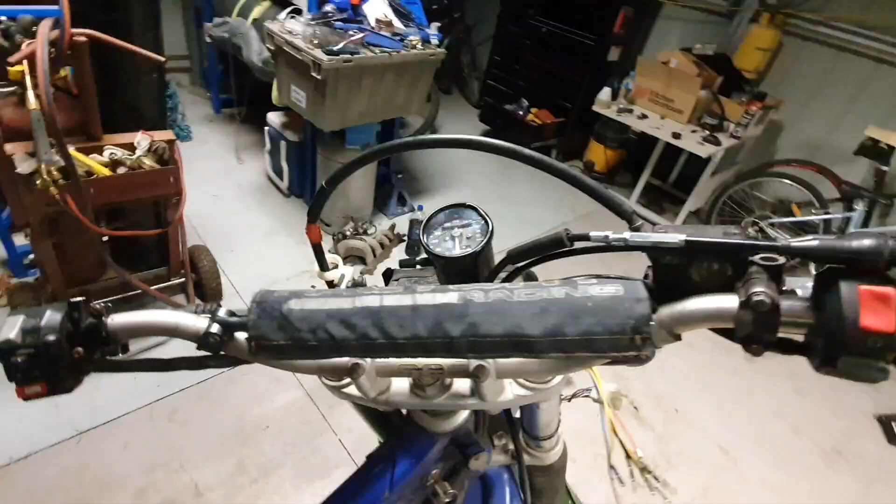Hey friends, what we're doing today is looking at the TTR and a small little problem we've got. I was fitting a speedo up onto it because we're trying to get this thing ready for roadworthy. Ignore the cracked screen, that's a completely different story.

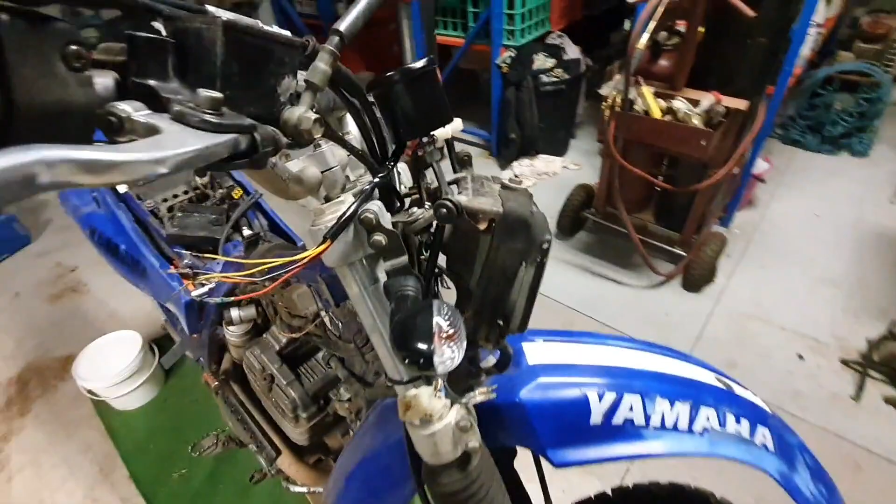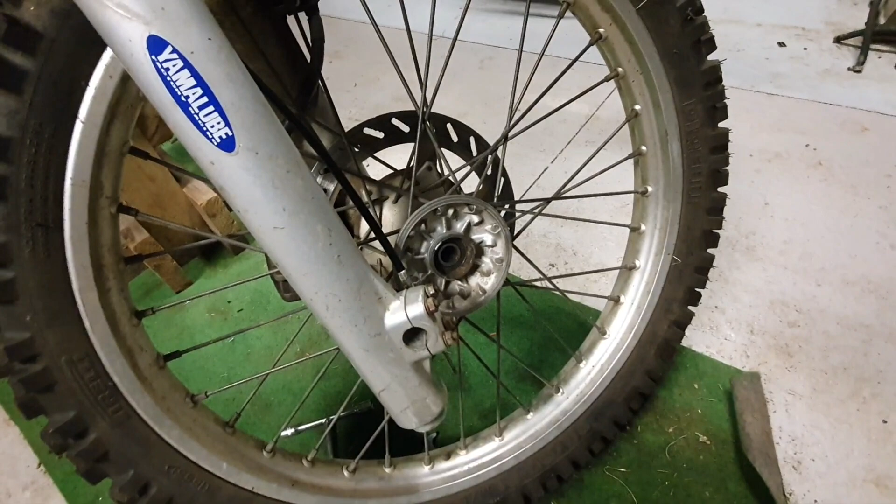But we fitted it up there on a bracket. Just did a little bit of bending and some mounts up there, and found a new speedo cable for it. And that comes down here to the wheel where there's normally a speedo drive. What I found is that when it was all fitted, it was spinning the wheel and the speedo wouldn't work. So a bit of a process of elimination.

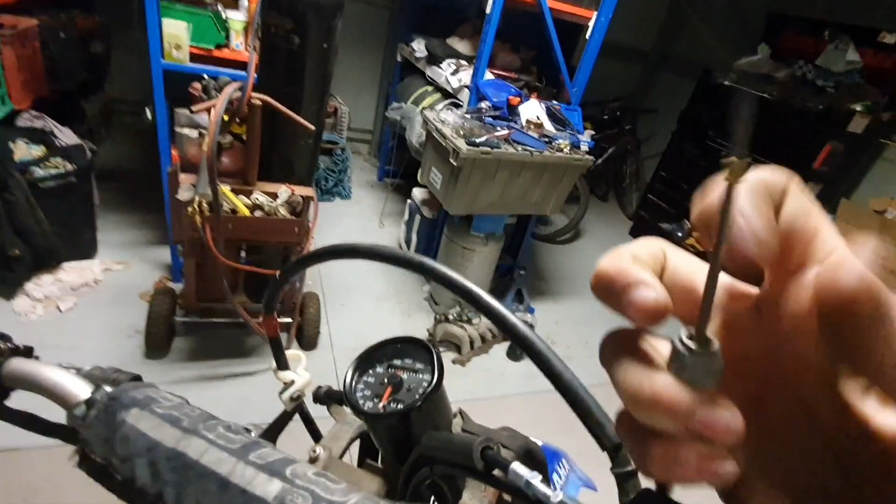Grabbed the speedo cable up here and got that all up in. Just push it back in there to line up. And I'm not sure if you can see that, but it is in fact moving when I spin that speedo cable. Don't quite have the fingers to spin it quick enough, but yeah, I think you can see that. It is moving ever so slightly.

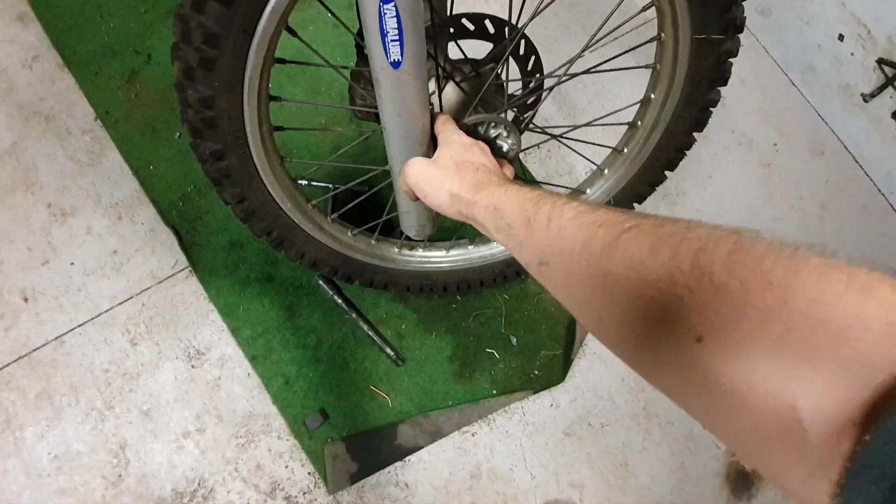So it says the speedo's okay, it says the speedo cable's okay, but it seems there was something up with the speedo drive. Now if you have a look in there, you can see a bit of rust and corrosion and gunk and all that, and that's probably going to tell you what the story was.

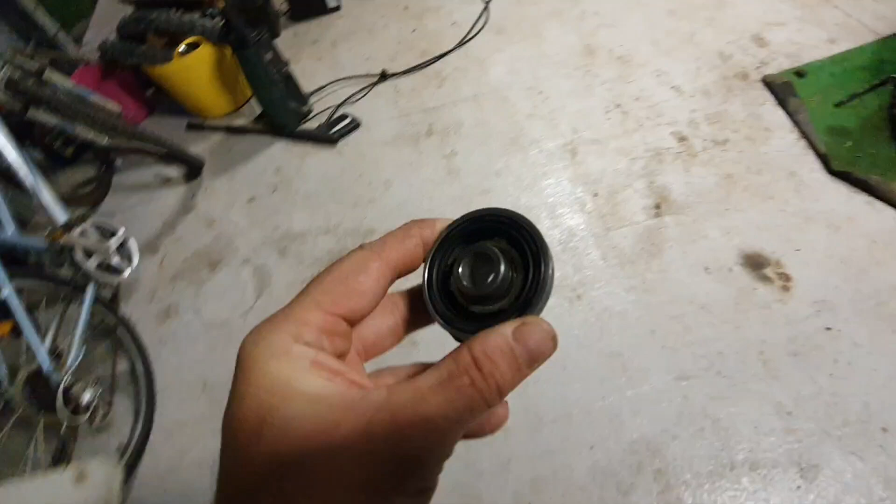Now I've already had a bit of a look at this, and this is the speedo drive, and that lives down here, something like that, and these two little nubs there sticking out of the wheel hub drive these two little teeth. Now when we're looking at that, it all seems quite clear.

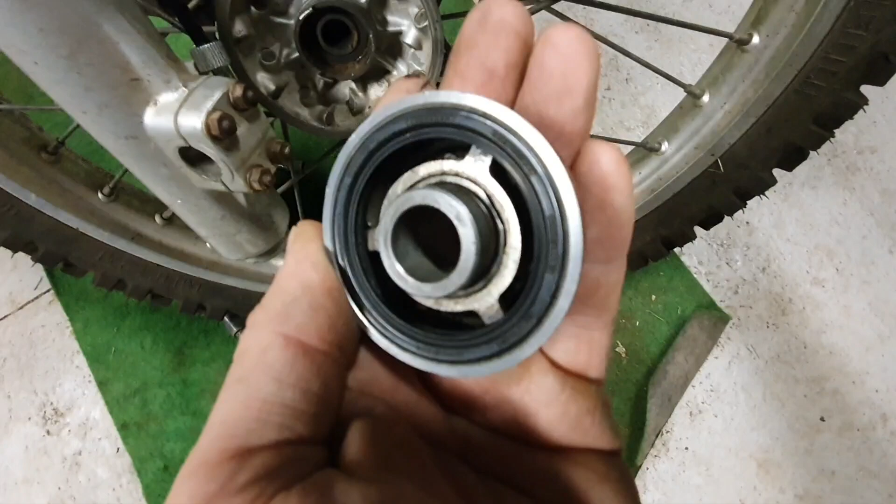I took this apart a few minutes ago and it was all just covered in gunk, and it seems as though that outer ring there is meant to sit on a couple of little flat surfaces on the drive gear in there. I'll take it apart so you get a better see. Alright, so I brought it inside where we've got a bit of better light and we can see what's happening in here.

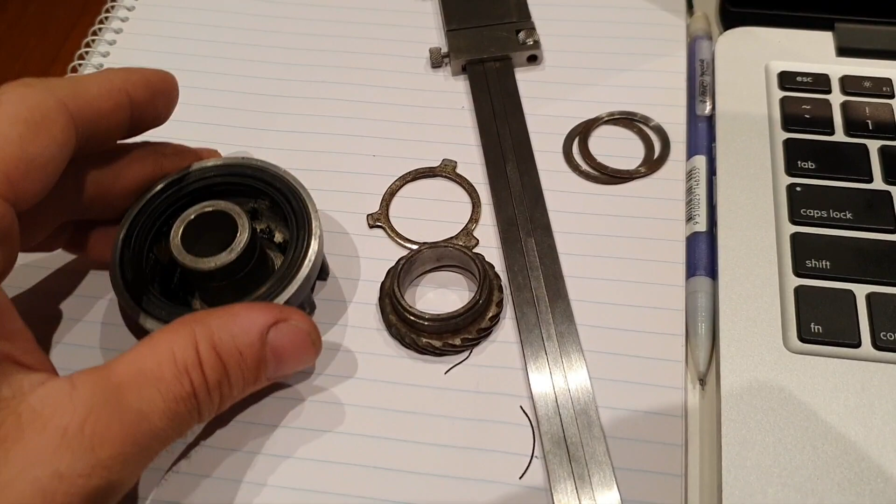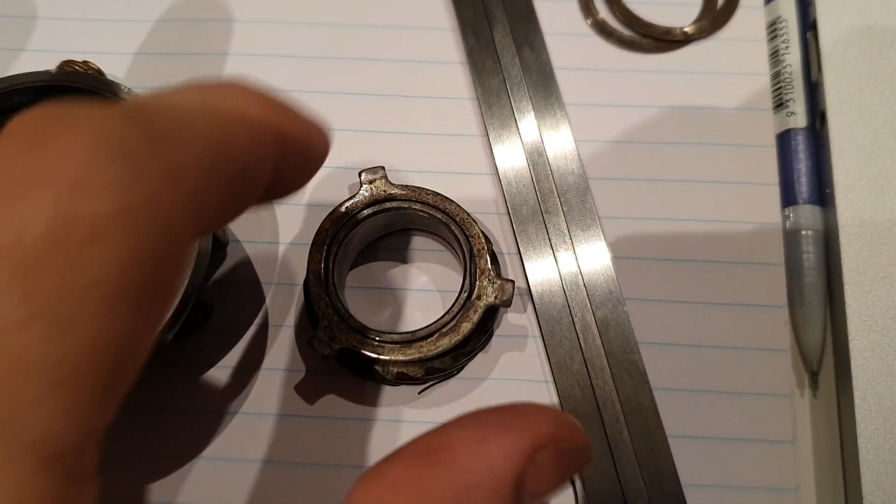This piece here is meant to go on here. And there's two little flat surfaces that have been machined on that gear there. One just in here and one here.

And this little ring, once upon a time, looks like it had a couple of matching flats, probably about there and there, just judging by the wear marks, that would keep that locked in place so that when the gear turns, or more to the point, when the three-spoked ring there turns, the gear would turn. A little corresponding gear up in there gets turned, and that would spin the cable and get the speedo spinning.

So I was thinking there's a couple of things we could do to fix that. One would be to just get a little welder out and maybe weld those flats back up, file them up, reshape it. Then I thought maybe we could cut another one of these plates from scratch out of a bit of steel.

But I figure it's kind of a sacrificial piece. It's the bit that we want to fail, and it'd be great to maybe have a few replacements of them. So I thought, why not put one of these 3D printers I got kicking around to good use. The idea is that I want something almost exactly like this little black piece here that's going to go sit on top of that there and replace this metal tri-spoke washer.

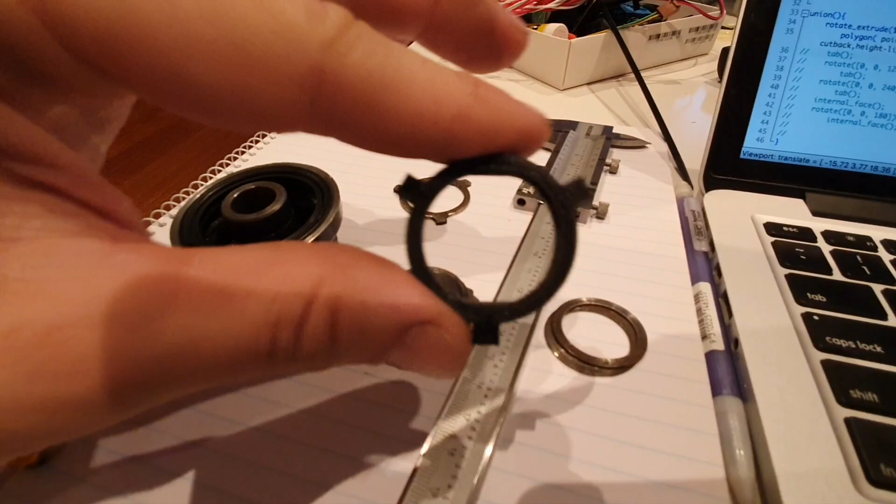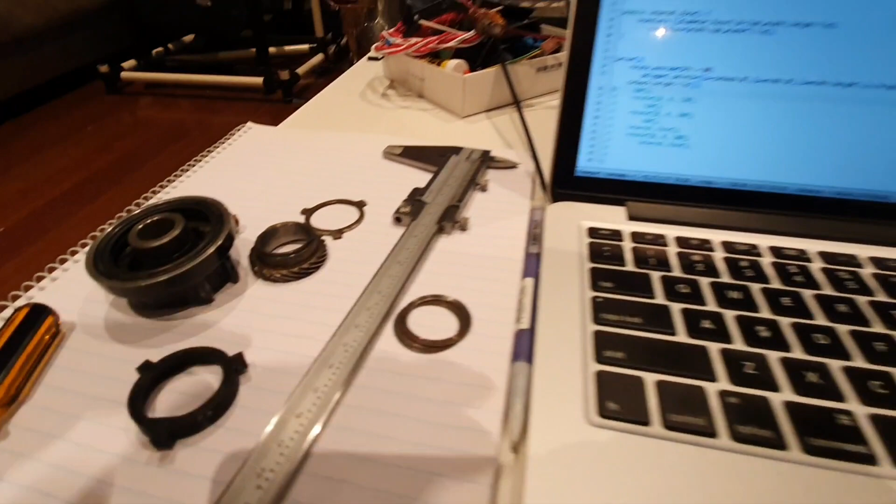And you can see this piece here, it's got the same matching flats on there, a flat surface there and a flat surface on the other side, and that lines up with the little flat surfaces that drive this gear here. And the way that I've done it is with a cool little program called OpenSCAD. OpenSCAD or OpenCAD or OpenSCAD, yeah.

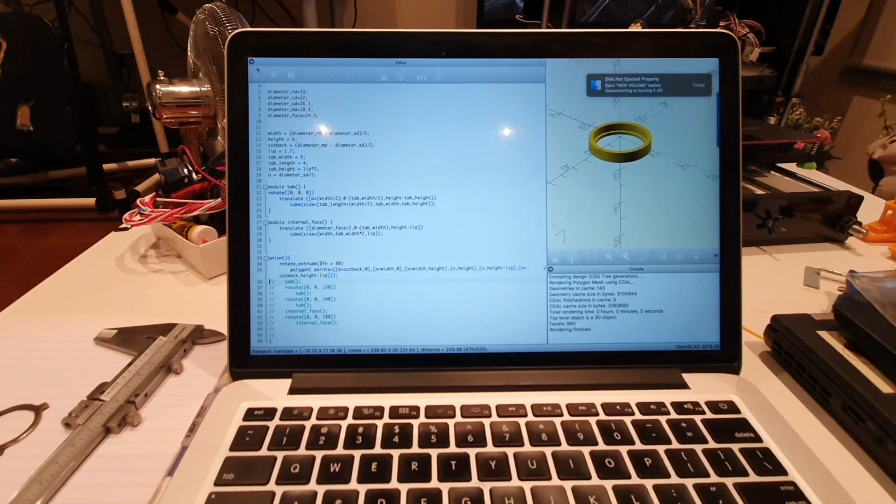And the way I've gone about it is what I usually do, because I don't know it very well. So I started off with their examples, and here's like a bit of a demo file that they've got, and they've got a few different shapes in there. And I've stolen a few ideas out of the way that they've made those, copied them across into my own file.

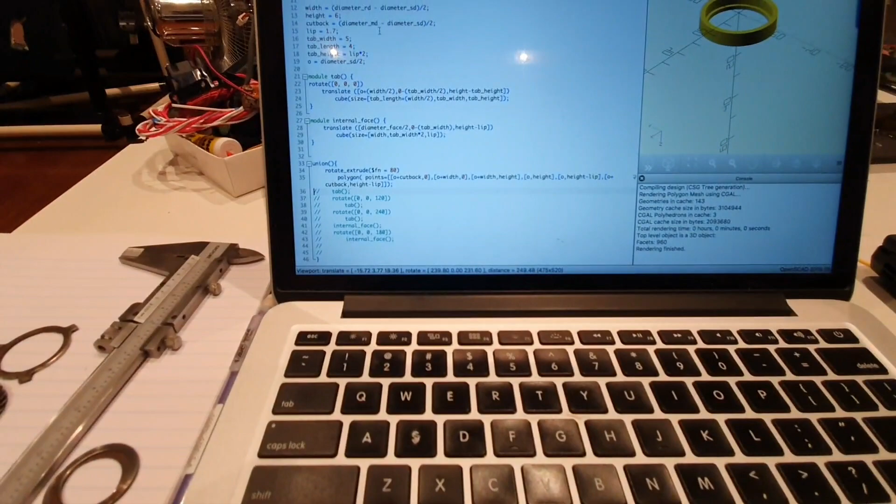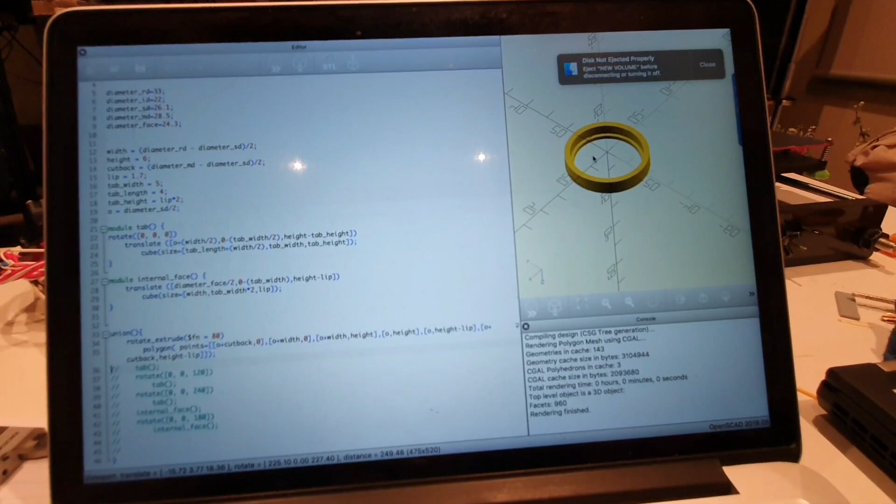You see I've started off by extruding out just a bit of a tubed shape there with a little lip on it. That lip corresponds with that tiny little step there at the top edge.

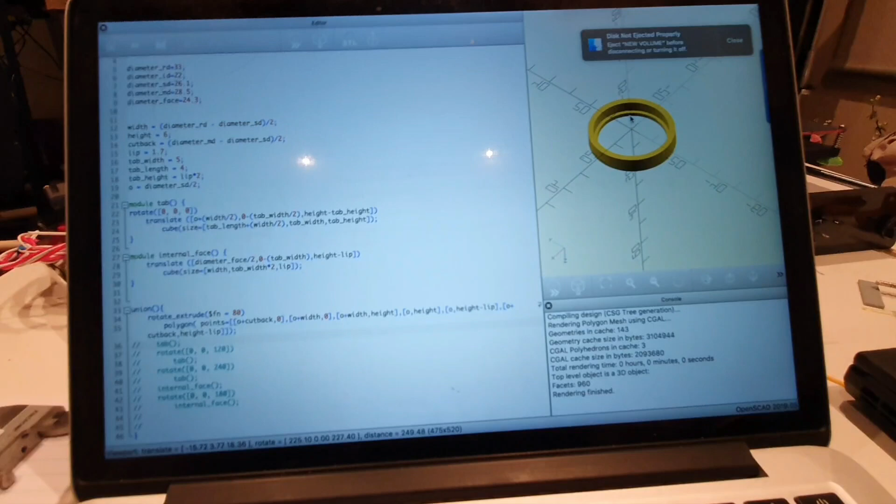And then after I've done that, I've gone and added in a tab. And I'll just do this step by step so you can sort of see the process I went through to make it. So the first thing I did was add in a tab, and you can see now we've got one tab on it.

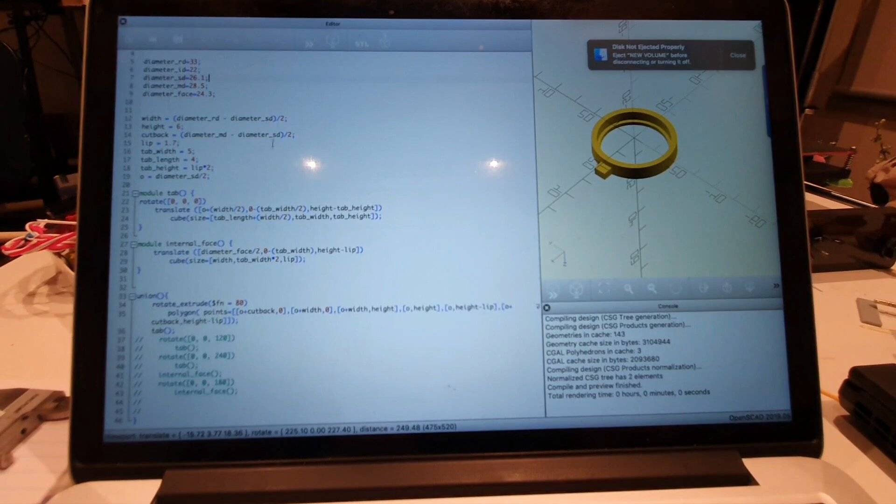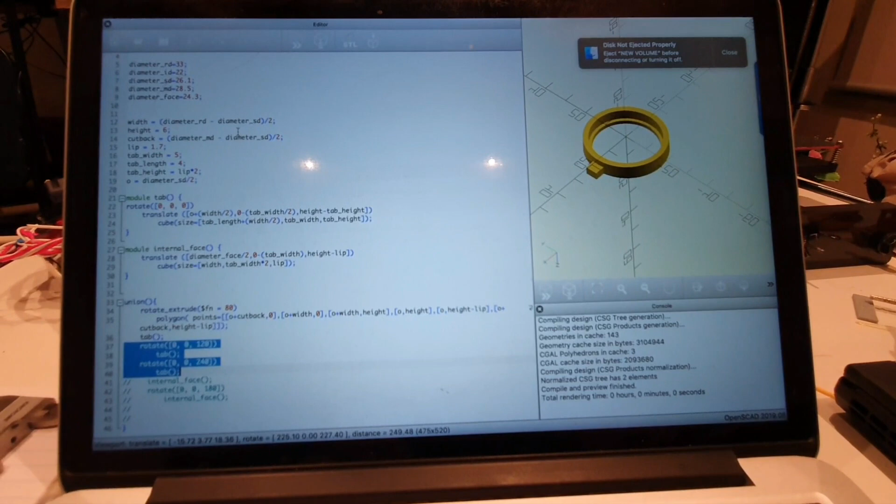So from there I just copied and pasted that. I was trying to find a better way of doing that, maybe some rotary spline function, but I just went with the quick and dirty option in the end. You can see we've got those 3 tabs on the edge, but you can see we still don't have those flat drives on there. So just a couple more lines in there.

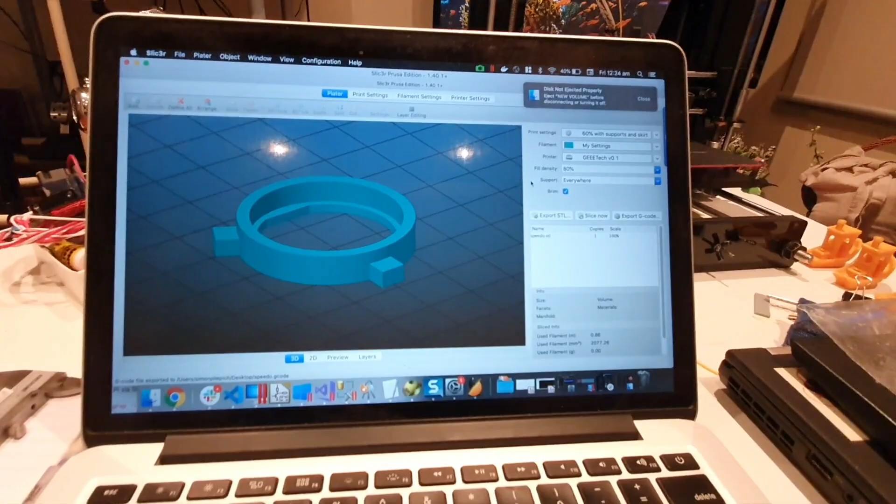We go in and uncomment that, rerun it, and you see now we've got those drives in there. So export that model out, bring it over into what they call a slicer. That takes that model and then turns it into a bit of code that the 3D printer can understand, and copy it onto an SD card and take it across to the printer. Then we play the really fun waiting game as it does its thing.

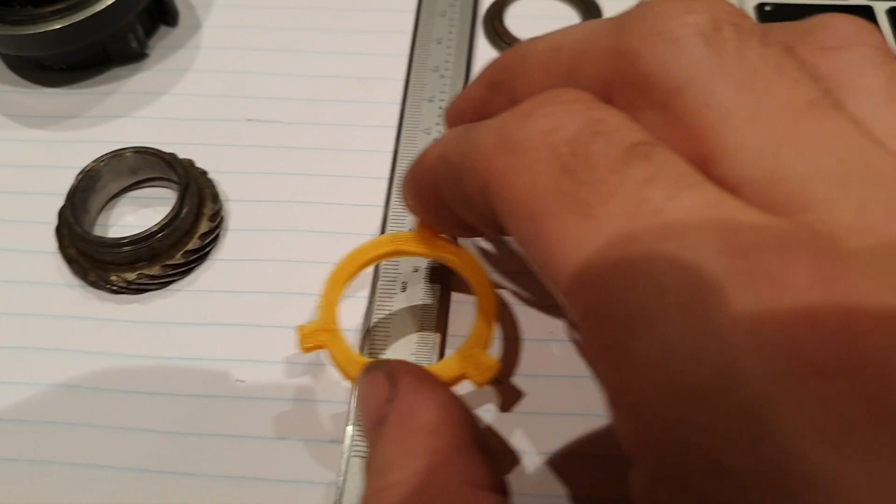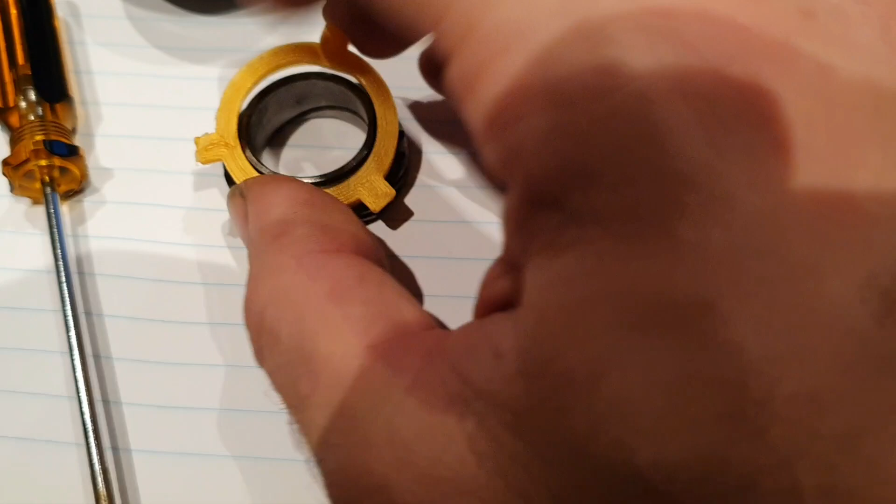So it hasn't quite gone to plan. The print quality is looking pretty good. Seems to be quite solid and quite firm. I don't know yet whether or not I've measured incorrectly or the calibration's out on the printer, but she don't fit. So just a little bit too tight. I can't quite squeeze that over that edge.

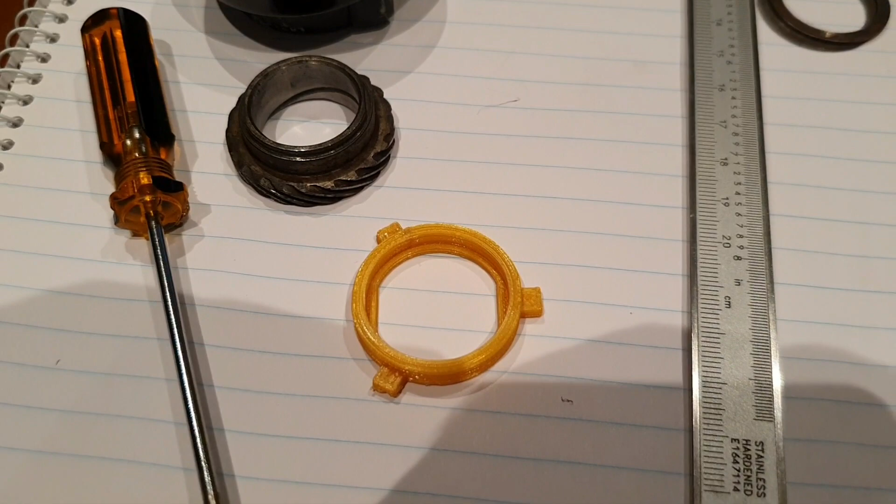And even on the flat side, you can see there it's just a little bit, let's line the flats up at least. It's just a little bit too small. Pretty sure I took the measurements alright, but as I say, this 3D printer's fairly new to me, so I think its calibration might be a little bit out. The measurements that I took, I pretty much relayed straight into the model. So yay for 3D printers.

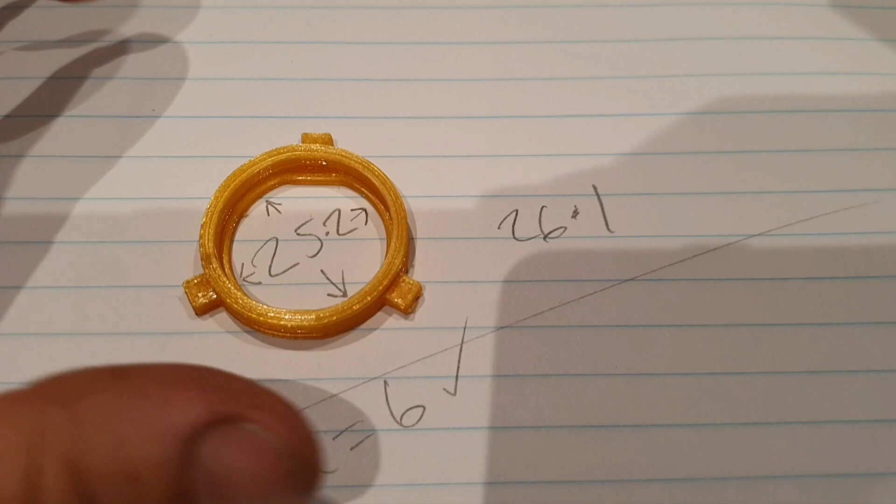I've just done some measuring on this, and in both the X and the Y direction, that inner edge there is 25.2 on the printed part, but I'd spec'd it at 26.1. You can see up here I've called that diameter out at 26.1, which is what I was expecting it to be, which says that something's probably going on with the 3D printer for it to come out small.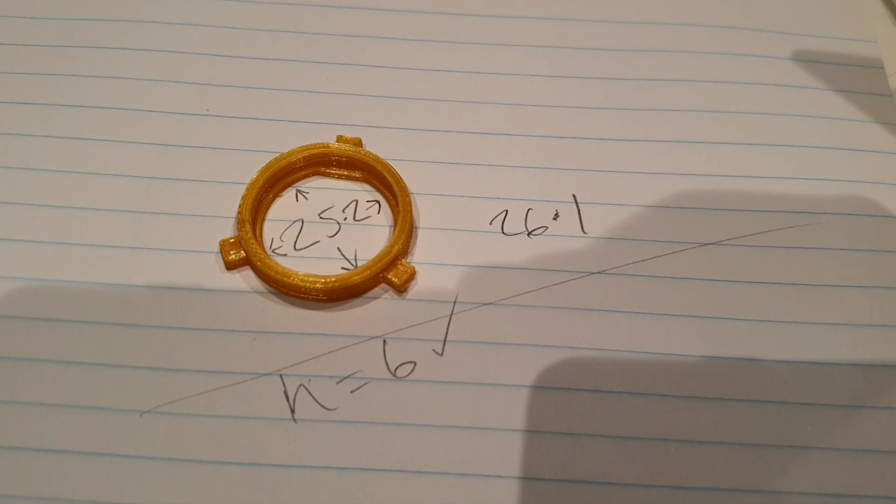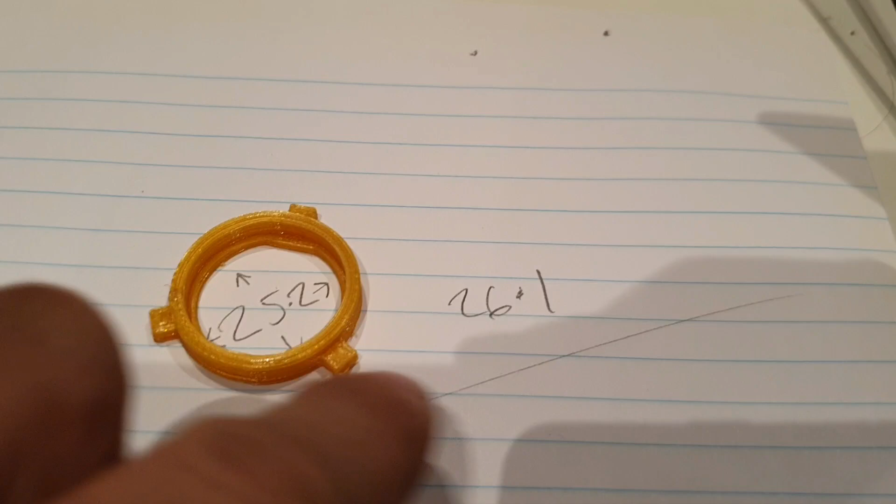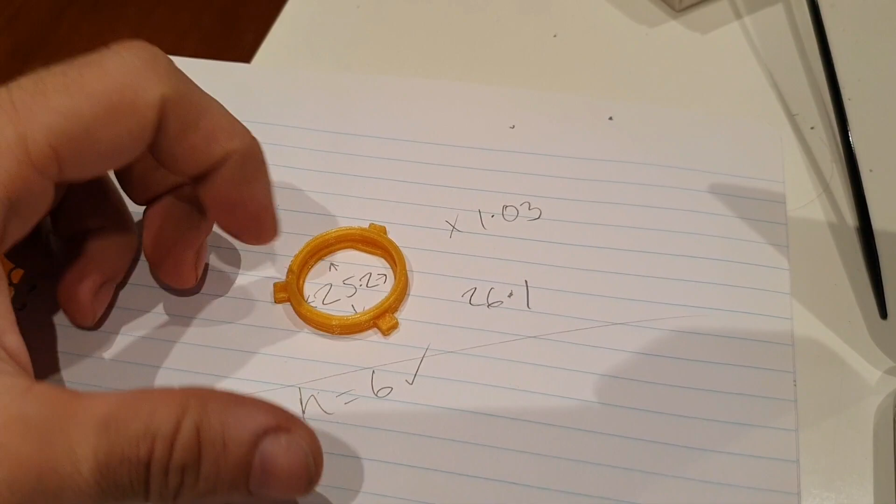However, the height dimension is spot on at 6mm, so pretty happy about that. That means that the calibration on the Z dimension, or the vertical dimension, is okay. It's just going to be the XYs that need to be calibrated by whatever the difference is between that 25 and 26. All right, with the help of a calculator, it's told me that we're going to need to multiply it by 1.03.

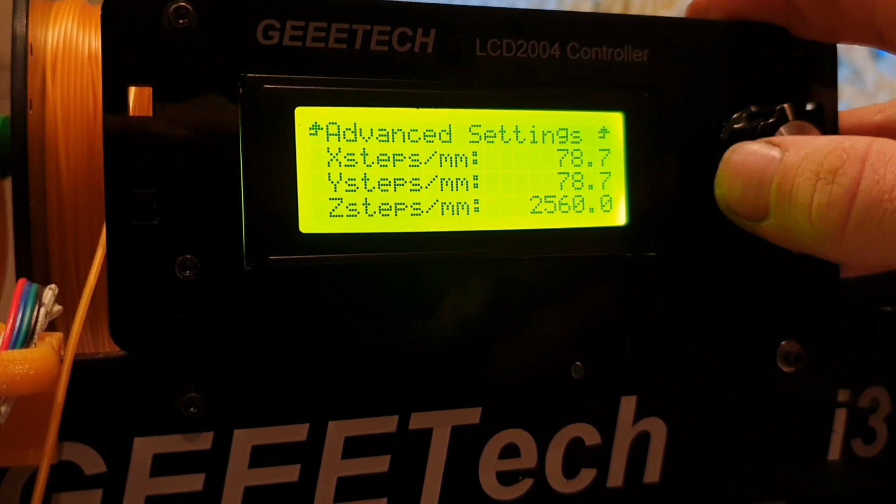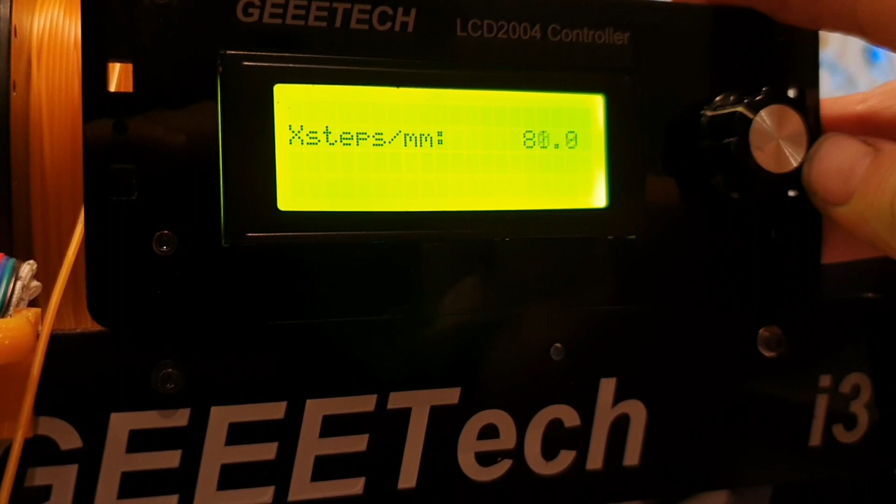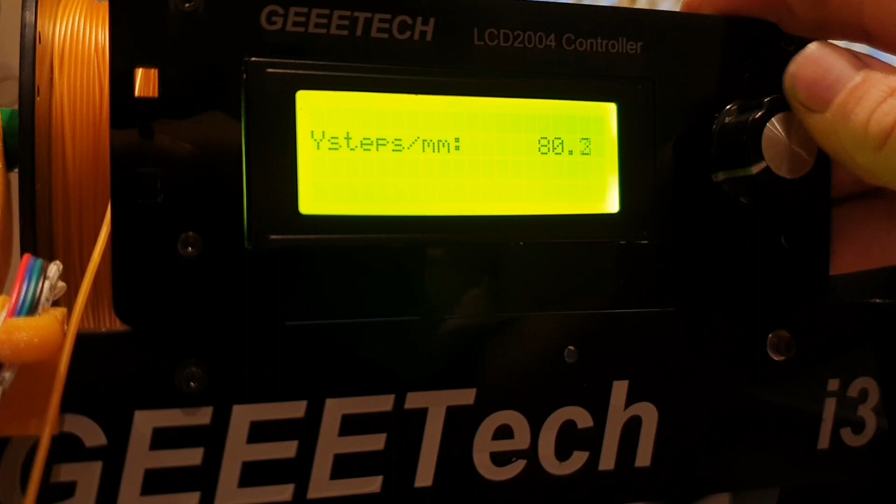So up on this printer here, which I still don't know how to use properly, we're going to come into configuration, and we're going to come down to, where are we? Advanced settings, and steps per millimeter. And we're just going to multiply that 78.7 by that 1.03, and that's going to give us 81.1. Now going by our measurements before, both axes had the same amount.

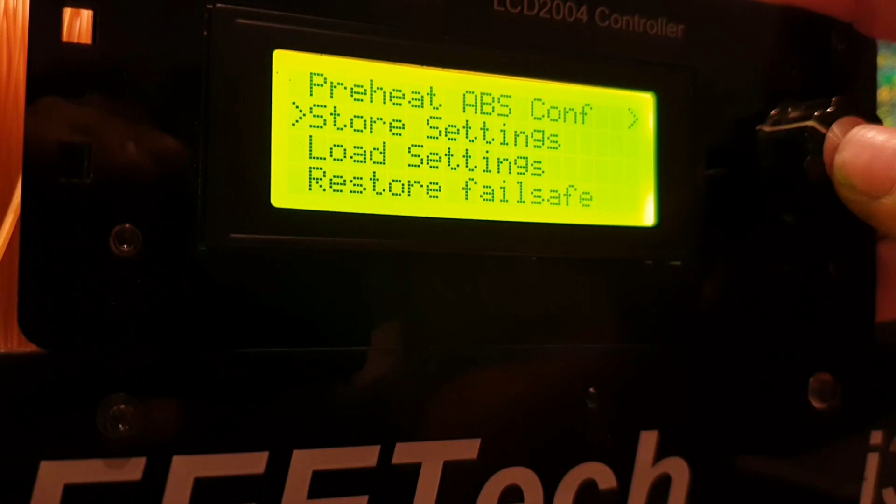Now I'm going to just hit this store settings option. If it was something a bit more risky, I might do the test print first, but I'm fairly confident that this one's going to be good. I think that beep means it worked. Just wait and see. Kick off another print and let's hope for the best.

So we've got a finished part. Made a couple more changes to it and had a couple more prints. I think we're up to iteration 6 or something now, and we've got a pile about that big worth of failed prints.

But all that matters is I think we've got something that's going to work. A couple of changes I made were just decreasing the lengths of those little tabs there. After we increased the scaling of the X and Y steps before, they ended up just being a little bit too big to fit in behind the dust seal there. But now they should fit in there quite nicely. Sneak past that seal.

And also decreased the width of the ring, so between here and here. Dropped that by a millimeter as well. I was just looking at it, and I must have mismeasured something on the original part. Just didn't look quite right. Didn't look like there was going to be enough room for the corresponding teeth on the wheel hub to slide in there. So just made a few little changes.

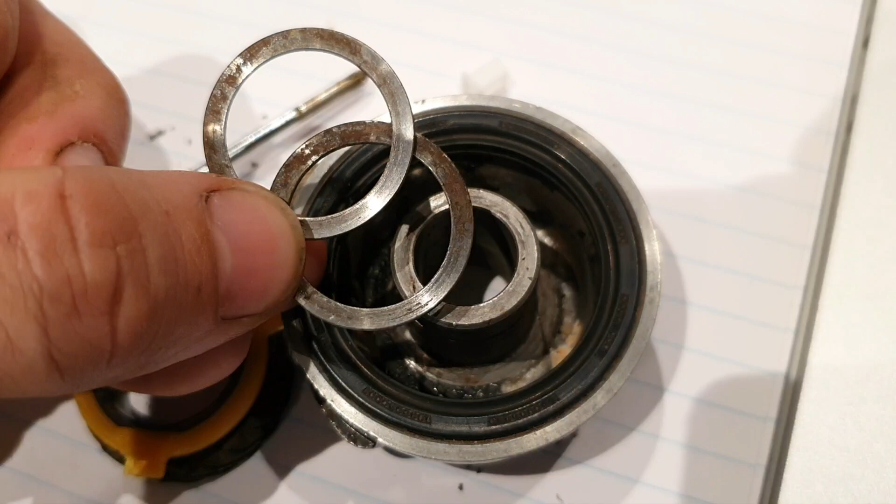So when I took this apart, and I'm hoping if there's any TTR250 owners out there that have been down this path before, both of these washers were on the bottom there, and I just don't think that was right. So I'm going to put it together a bit of a different way and just hope that it works. It just seems to fit with my sort of mechanical sympathy a little more, and that drops in there. And then I'm going to actually put this washer on the top there.

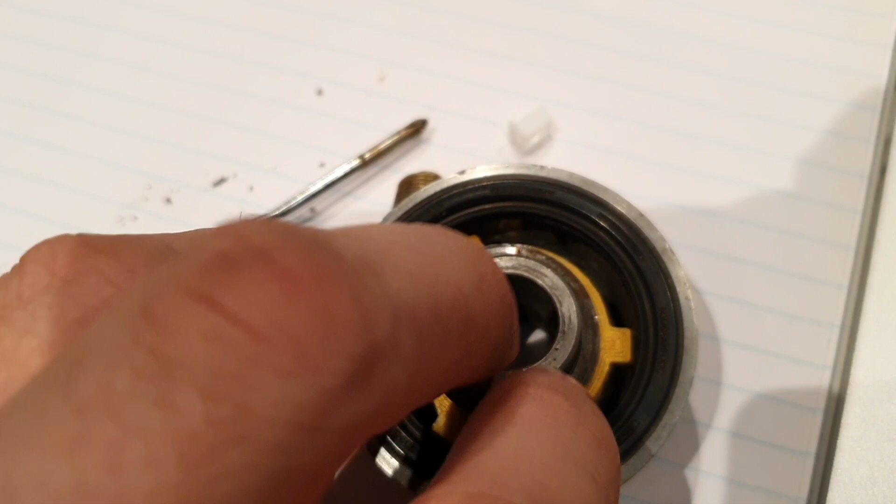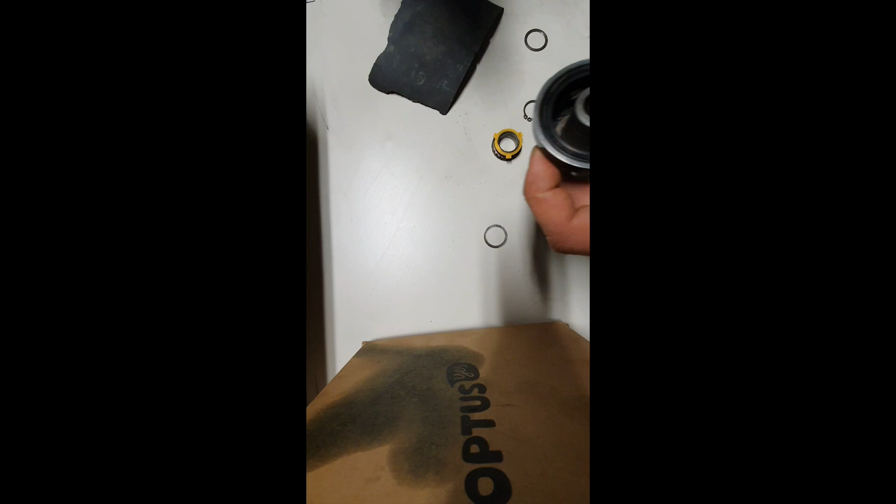Now somewhere in the shed on the floor there's going to be a little snap ring that pops into that groove and stops everything falling apart. It's got some lithium grease here. Going a little bit generous on that. I figure it's probably going to pull up a fair bit of that dirt that's still in there. So if there's plenty of it, the dirt should work its way out a bit easier.

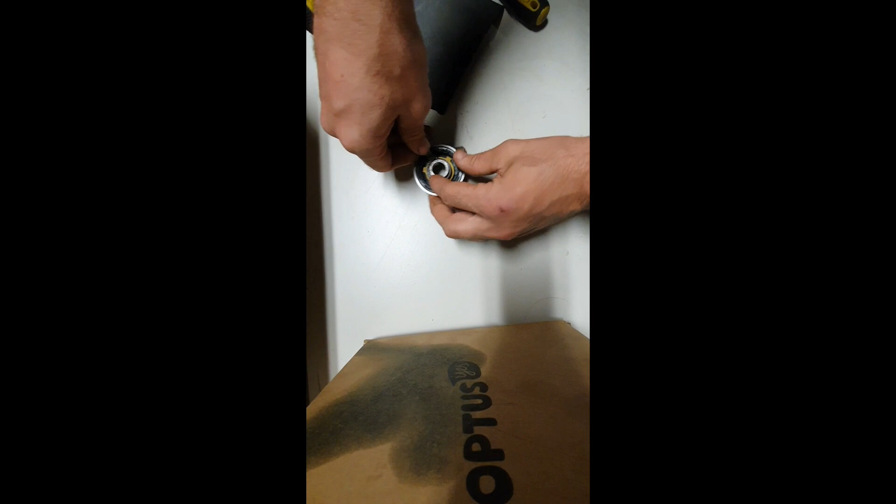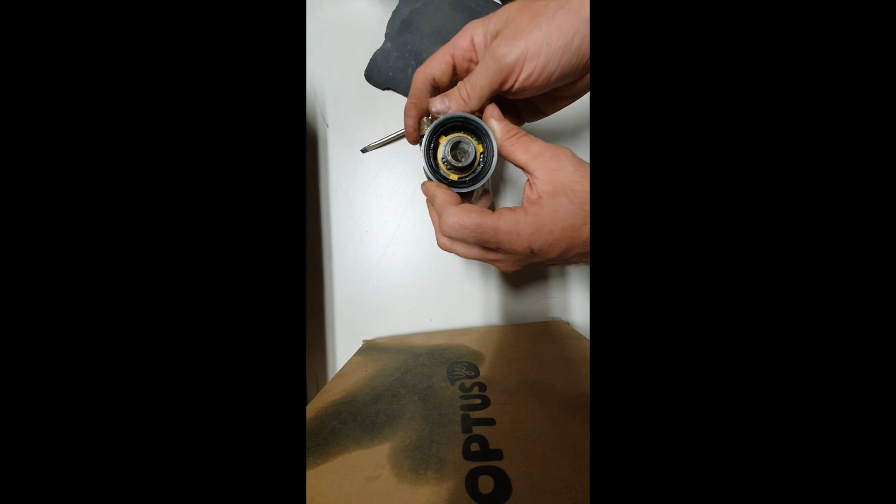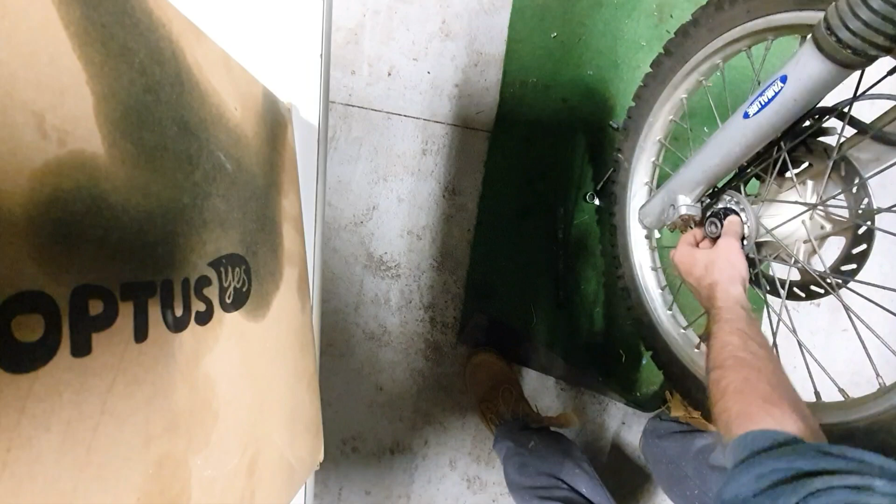And click. Alright, moment of truth. Let's put it on this bike and see if it works. Good sign.

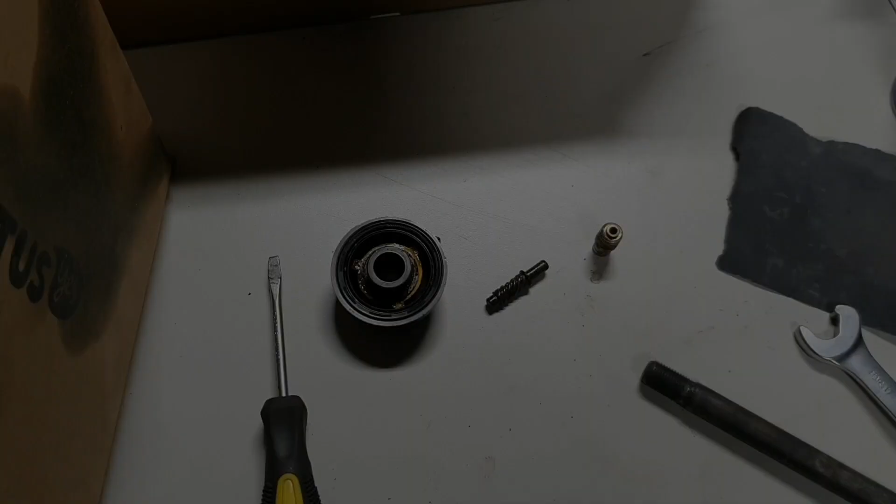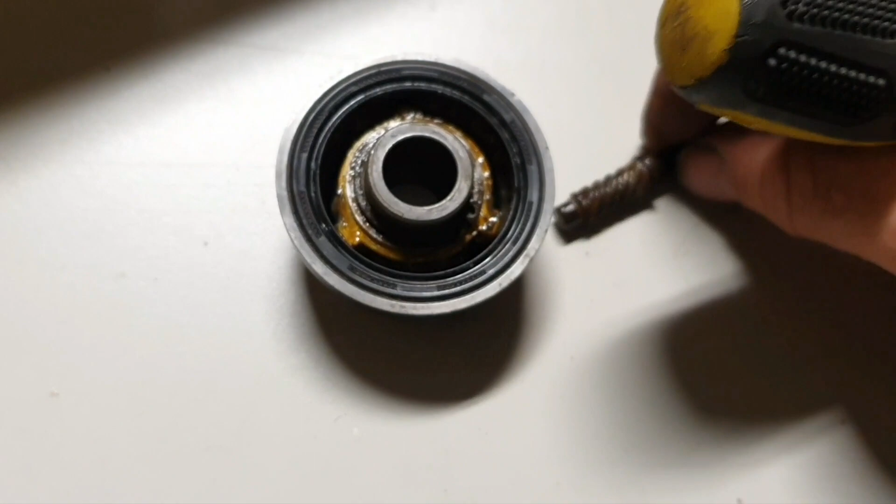Unfortunately I've had to take it back out again. It seems that the drive there is working okay. The teeth are engaging and they're spinning the gear around as you'd expect. But the little gear that goes down in the side here, up in there, for some reason it's got a lot of play in it, so as it moves backwards and forwards it kind of cocks in place and then locks this up, and then stops it from spinning. So

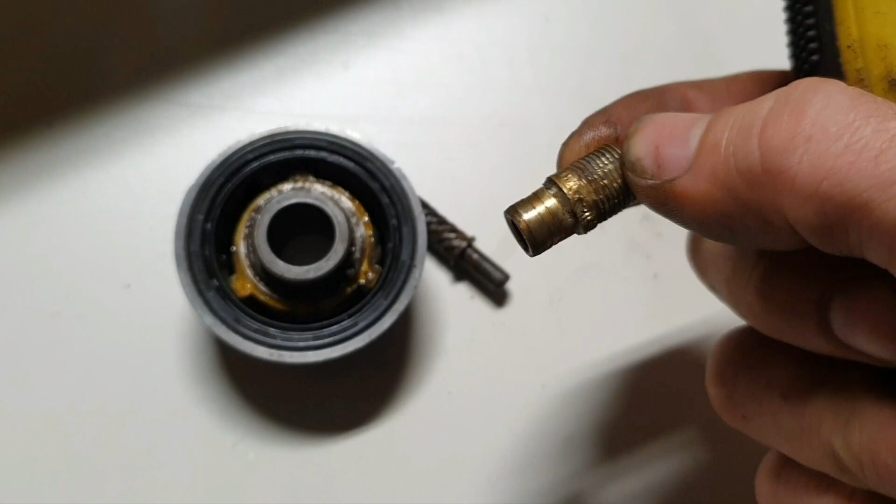as you can see, it's fairly grotty and it needs a good clean. The other thing I noticed is that this piece here, which retains the pin, and also where the bit screws in, you can see there's a bit of dirt in the collar there. This wasn't pressed as far in as what it should have been. So the fact that wasn't in is probably why this was able to move backwards and forwards and not do what it was supposed to do.

Alright, so after taking the speedo drive apart 4 or 5 times, cleaning up a whole heap of the rust, etc., melting out one of these, trying to spin it with the drill, printing another one, and finally refitting it, we've finally got it all working. The other one of these that I printed was pretty much exactly the same, just in a different color plastic. The dimensions were all the same.

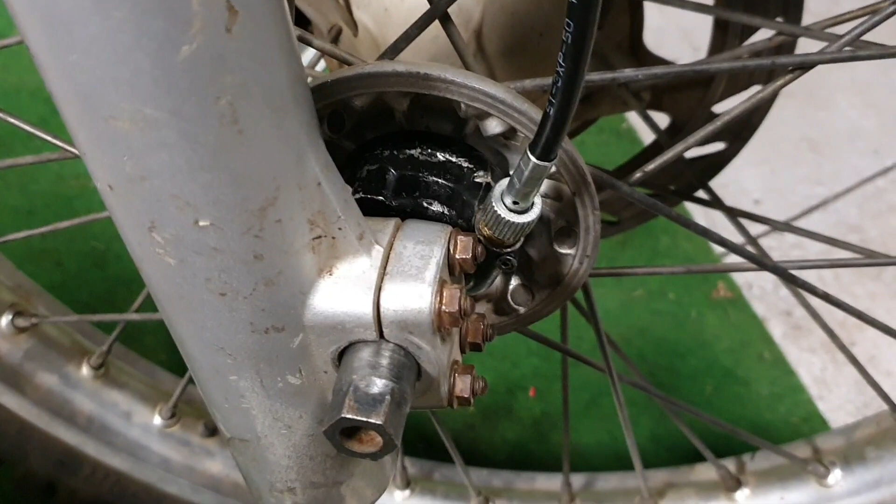The gear inside there, when I took it all apart and wire brushed it all back, they're fairly pitted and rusted, and I really don't have a lot of confidence in them. As you spin them around, they feel really rough and bindy in spots. So I have a feeling that before too long it's probably going to bind up down the road somewhere and strip the teeth off that plastic, or maybe not strip the teeth, but probably strip the same flats that we saw on the steel washer wear out. But we'll wait and see, and it's at least a cheap fix if it happens again, and I'll keep my eye out for another speedo drive.

So I hope you found this interesting. It's been a bit of fun. When the new speedo comes in, I'll fit that and probably look at wiring those up into this plug here.